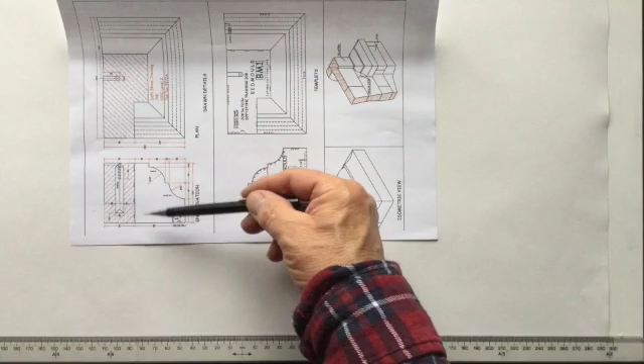Right, so I'm going to start with drawing the section, which is that one there, and it's going to be laid out on our drawing exactly the same as that. And the reason for that is we can transfer all the lines from these fillets and things across through onto the bed mould when we draw it beside the section.

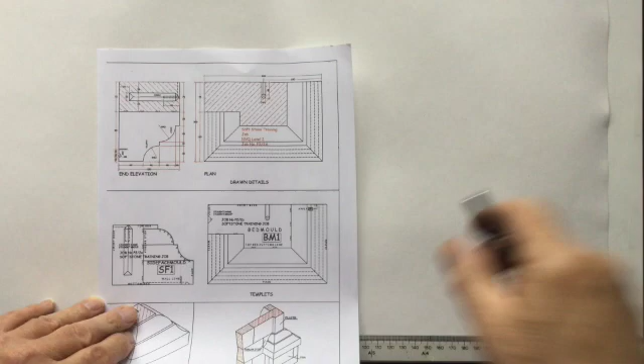So I'll get started with drawing the section. So the size for it is 150mm that way, which would be the height of the section, and 200 in width. All right, so that's the width of the stone. So I'll draw that to start with. So this is obviously 1:1, full size.

You can't see that, can you? I think I might have to zoom out a little bit. Here we go.

So it's 150. I'll just check I've got room to draw the section, the bed mould beside it, which I just have. So we've got 150 there. And this ruler's resting against my board square, so I can draw a line with it.

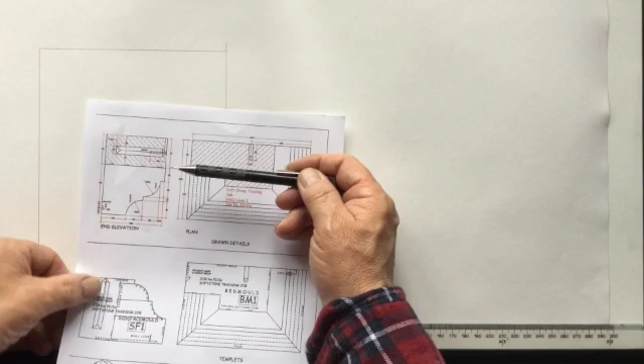Right, so that's the outline for our section. So the next thing we need to do is draw in what would be our wall line. So that is 75 from the back, and then another 35 down for that first fillet. I'll use a ruler for that.

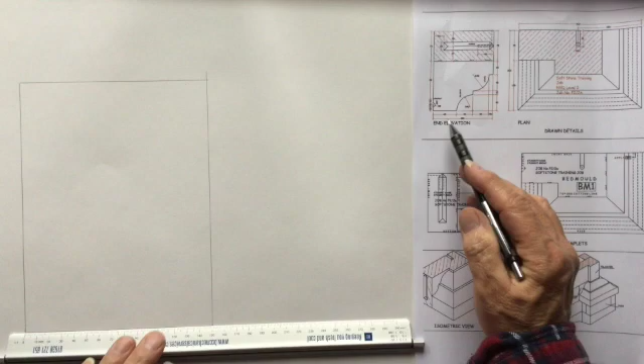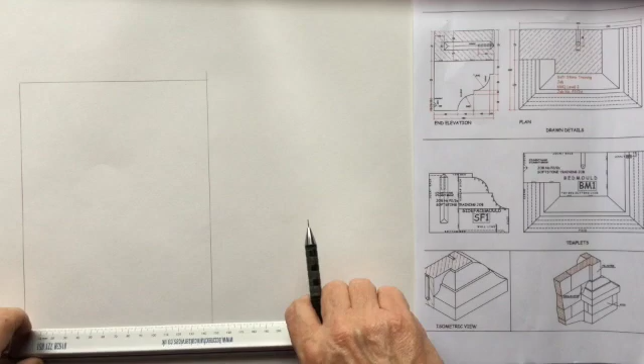Okay, so if we put all our sizes down on the front of the stone, we've got 60mm to start with, then another 40, which is 100, another 40, which is for the ovolo, and then 10 for the fillet. Alright, so this is where the magic starts to happen now.

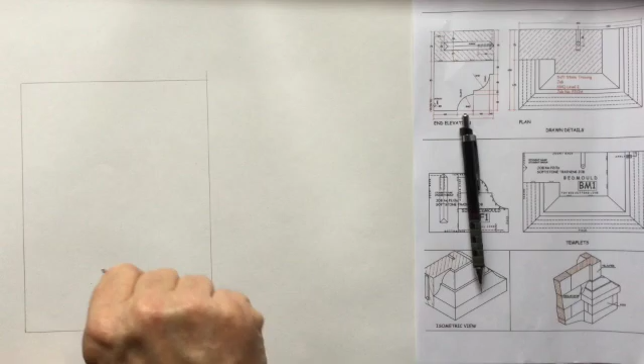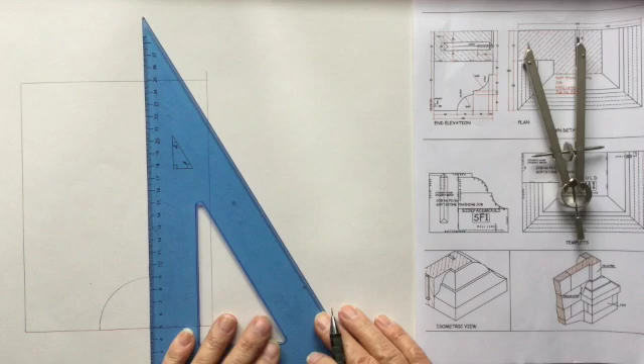You get your compass, set it to that mark there, we draw that up there like that, and then if you put your square against that second mark, where you just put your compass, you can draw your fillet, which is 10mm. So that's 10mm there. Alright. Now we carry on with that line up faintly.

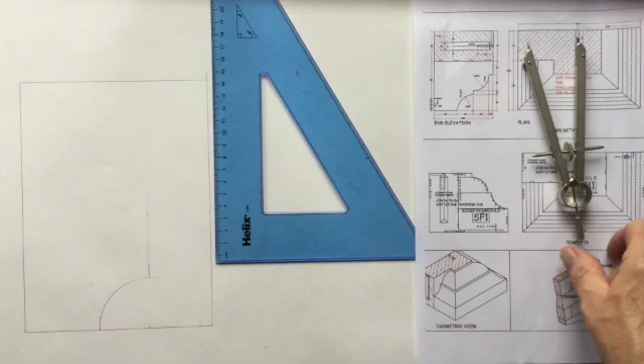The radius of the ovolo is 40. So if we go 40mm at that line, which is just there. The radius of the cavetto was 40, so this ovolo is 40 as well. So if we put the compass just there, oh, make sure you've got it held firmly or else it will come out. Right, up there.

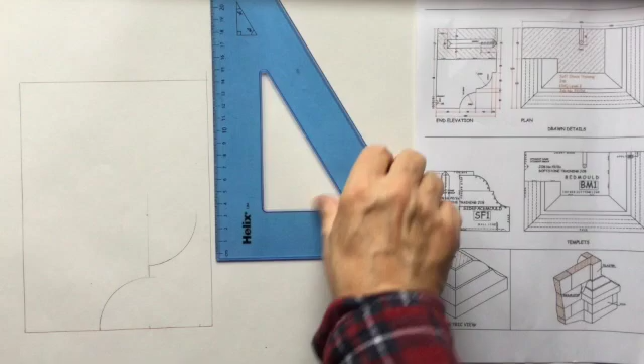If we bring the board square up to the point where we had the compass put in, and go like that, that's the actual shape of the section drawn. Alright. Just there.

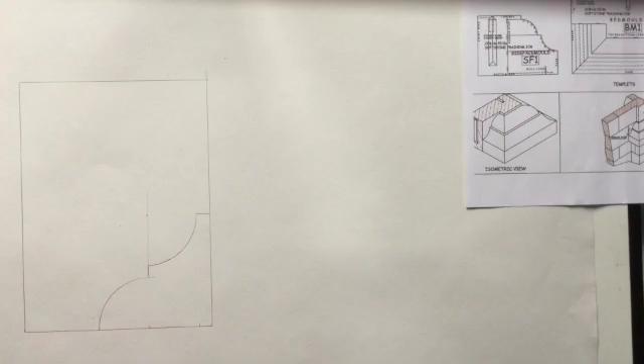Right, so if we put our wall line in now, which is 125 back from the front, just there. See if I can get this board square up without wobbling everything. Okay, that's the wall line.

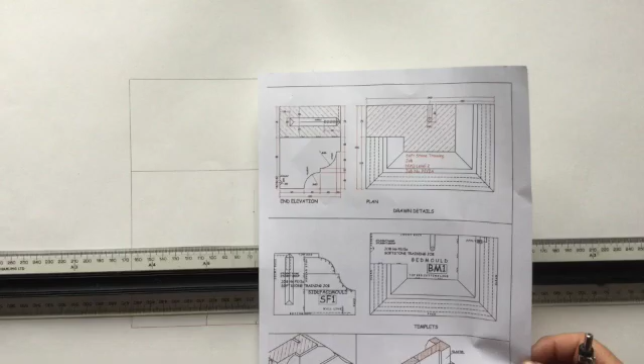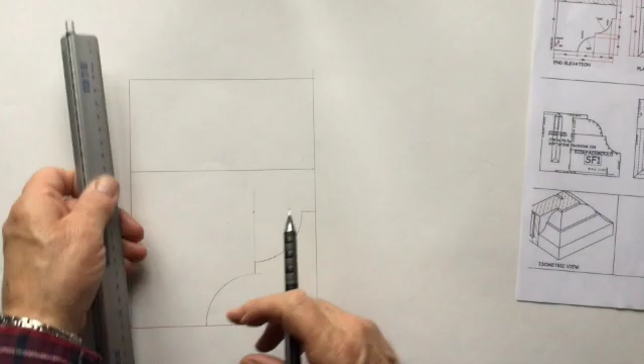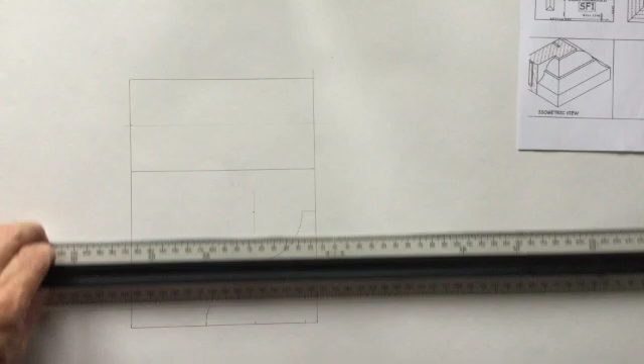Which bit should we do next? I think we'd better do the joggle next, which is that little thing in there. So the centre point of that joggle will be in the middle of this section. So half of 75 is 37.5. Get my ruler on there. It's just there. We put a faint line up through there like that. Not sure if you can see that, but that's the middle of our joggle.

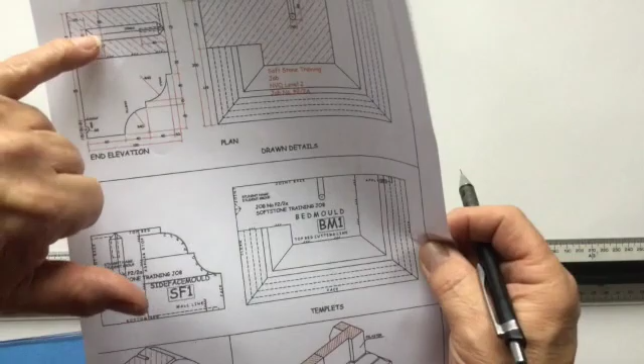Now I'm going to use the 45-degree set square to do a little line off that way and a little line off that way. Now if you have a look, that joggle's 20mm wide. Can you see that? Yeah. So that'll be 10 each side of that centre line. Like that.

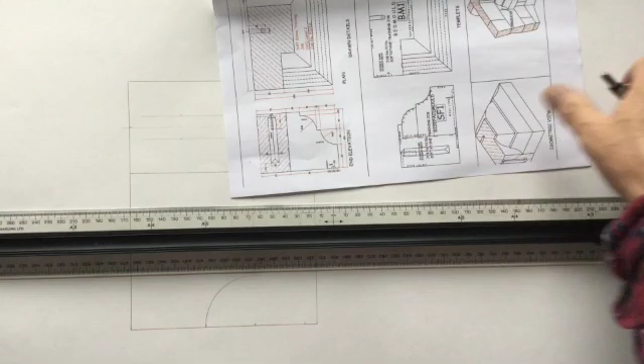Do another line up there like that till it hits the 45 that I did. And another. Now that is 25mm. There's one that side. It's 25.

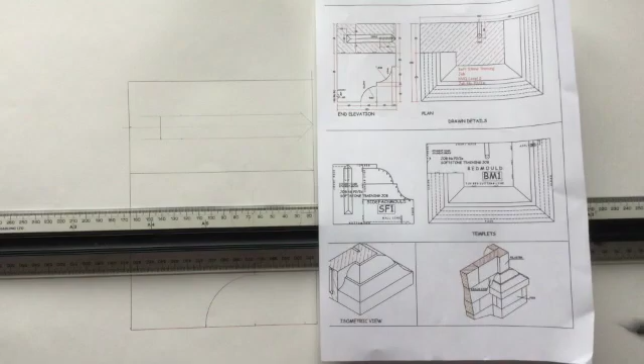That. So that's our joggle drawn. Now, I don't know if you can see the drawing. I've got a couple of extra lines to put in. Move it down a little bit. We've got that, which is the bottom part of the joggle to draw in, and then I'll show you how to draw the red lines that are hatching.

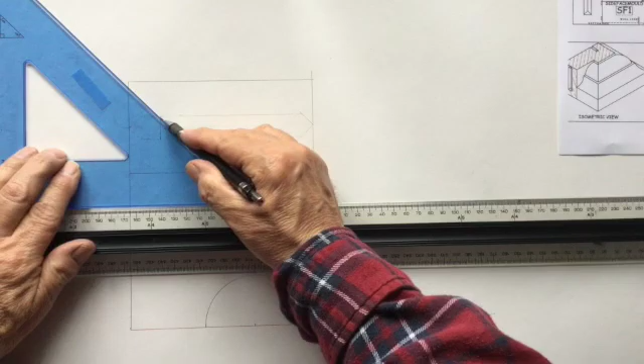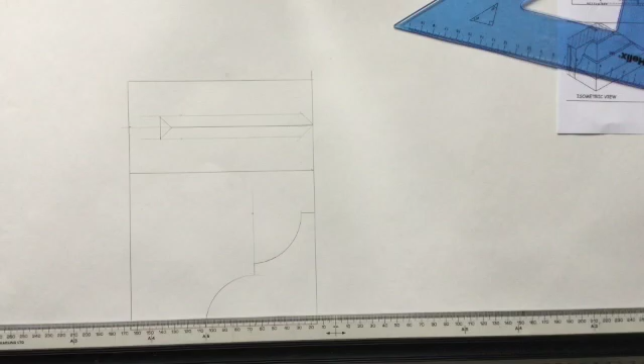Alright, so it's quite simple to do that bottom part. It's just another 45 drawn off the corners like that. So if we put that line in a bit darker now, like that. Right, if I swap pencils for my red one.

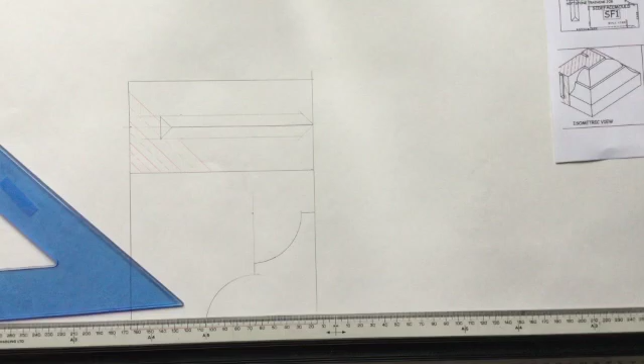Now what I'm going to do now is called hatching, and it's an indication of a part of the stone that wouldn't be visible when the rest of it is fixed in the wall, so you wouldn't see it. Alright, so it's one dotted line, one solid line. Like that. Okay.

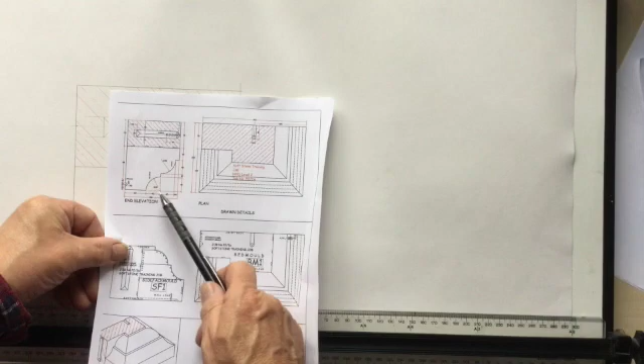Right, we're going to draw the bed mould now, which is going to be off to the right hand side of the section. The gap's not going to be very big between the two. And because I can't get far enough away from it with my iPad to show the whole drawing, what I'm going to do is take some lines across from all these little points, which will result in all these lines here, and then I'll move the camera over so you can just see the bed mould and you'll see how I draw that.

Right, so these will be dotted lines. That one's a solid one. There's that.

Come on. Up you go, you know you can do it. Sorry about this, the bottom of the drawing board gets caught on my base from my camera.

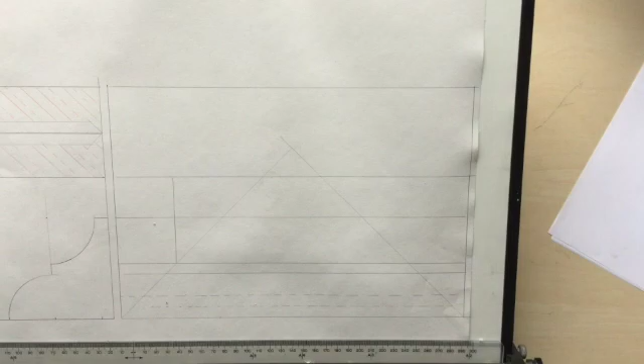Okay, so that goes like that. Right, and then all of these lines will go... that one should have been dotted, sorry about that. That one goes in there like that. Okay.

Now this one, because you would see that from looking down on top of the stone, goes there like that. That one goes in there like that. Now the reason for these dotted lines is that if you were looking down on top of your stone, the thing that we call a drip that's on the underside wouldn't be visible from the top. So we draw it in with a dotted line to show the mason that's working it that it wouldn't be visible from the top, and it goes on the bottom of the stone. Alright.

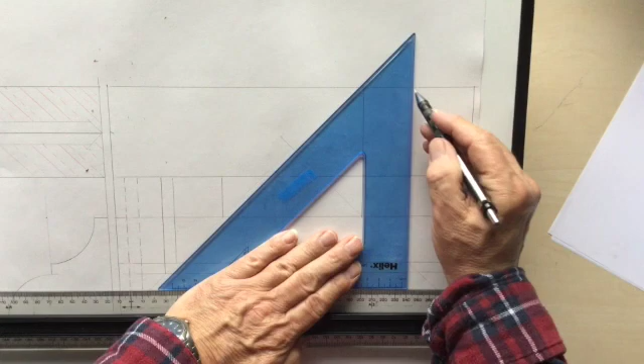Right, so now basically all of these lines go right the way to the back. Like that. That one's dotted.

Sorry about the voices in the background. It's my wife on the phone.

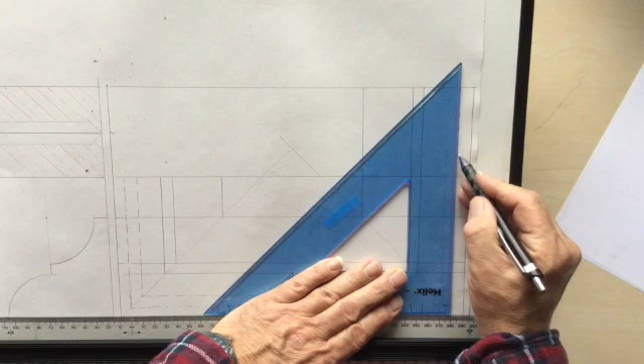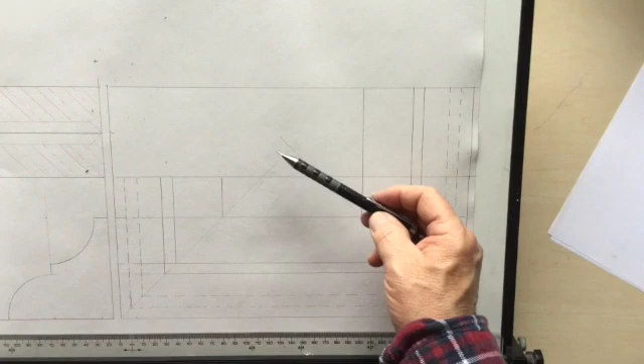Right, so basically that's the bed mould drawn. All that needs to be done now is to make it a little more clear. We could perhaps go over it in pen and then rub out all the lines that we don't need. All right, but I will do that off camera and then show you it when it's finished.